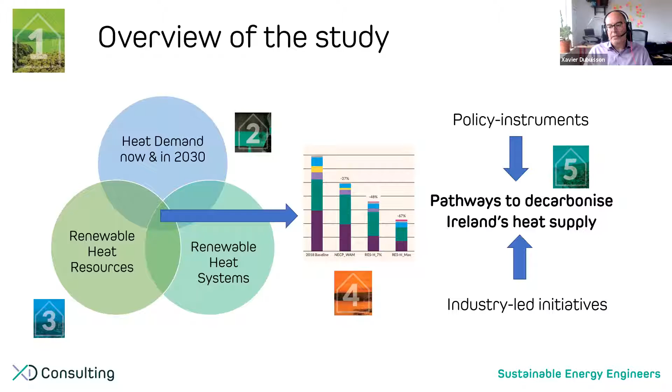Very importantly, there was detailed reflection within the group and the different members of the steering committee and their representative associations to feed into the chapter around policy instruments - what is the ask from the sector to government, at national and local level, to support the decarbonization of heat supply in Ireland, and also commitments by industry to take action. So a number of initiatives have been stated, and a declaration of intention very clearly setting out how the industry is going to support that transition.

So let's look at heat in a bit more detail. So far, heat has been the neglected sector in terms of renewable energy and decarbonization. In fact, the national understanding of heat is limited, so delving into available data to develop a clearer profile of heat was an important first step. And heat is actually a very significant part of the challenge in terms of decarbonization.

Heat represents about 21% of national greenhouse gas emissions, significantly more than electricity. Agriculture is about a third of all emissions, but heat is above 20%. It's very significant, also about 40% of national energy use. Every year we spend about 3 billion euros sourcing our heat supply. Most of that is imported in the form of fossil fuels, with 90% fossil fuel contribution to our overall heat supply, and we're depending for 65% on imports of energy to meet our heating requirements—fundamental for keeping our homes comfortable, our hospitals heated, and our factories going.

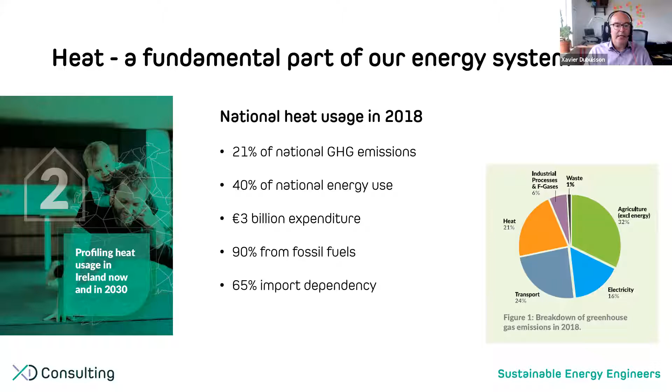So then we looked at heat demand into the future, using the National Energy and Climate Plan scenario with additional measures, which represents the policy landscape and expected outcomes for 2030. From that analysis of projections, we derived the likely future heat demand. If we look at 2018, on the left bar in the chart, you can see we're currently about 45 terawatt hours per year in heat demand, with the building sector representing around 60% of the heat demand, and industry playing a significant role.

But that role is going to grow into the future, where we see industry thermal energy demand growing significantly, while through energy efficiency and energy retrofits, we're going to see a drop in overall heat demand in the residential and tertiary sectors.

Another way to slice heat demand is to look at the temperature profile, which is really interesting in informing the kind of solutions suitable for decarbonizing heat supply. So in that context we looked at the distribution of different temperature profiles in terms of heat supply.

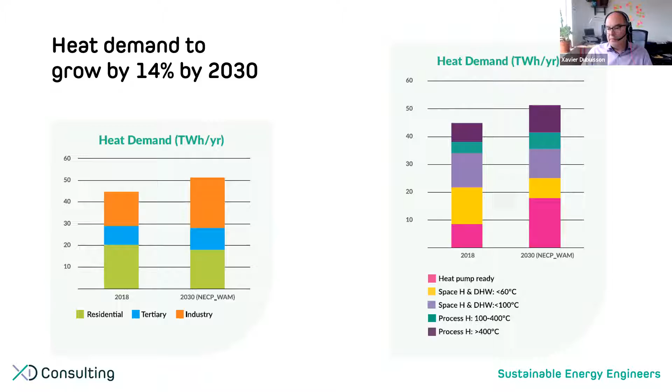So then we looked at all the renewable energy resources available to decarbonize heat across the whole spectrum. There was an extensive literature review and discussions and data gathering with the different associations involved in the study, to look at how much solid biomass we have, the extent or suitability of heat pumping in the building sector, biomethane or biogas, the role of district heating, solar energy, geothermal energy, and also very importantly, the availability of waste heat.

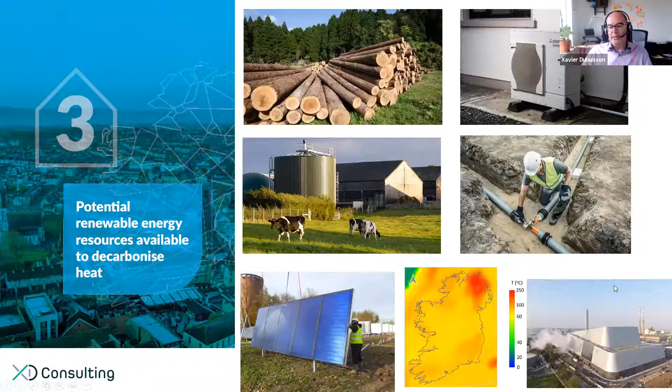Out of that resource or potential assessment, the key message that came clearly out of the analysis is that there are a lot more resources available than our future heat demand will require. You can see on the graph on the left the extent of renewable heat resources available in terms of the potential identified, and on the right side you've got the similar bar chart I showed you earlier with the projected heat demand.

Again, the key message is that we have plenty of resources within Ireland to meet our future heat demand and decarbonize it with renewable energy sources. Within that, we see a very important role for bioenergy, with about 34% of the potential resource available.

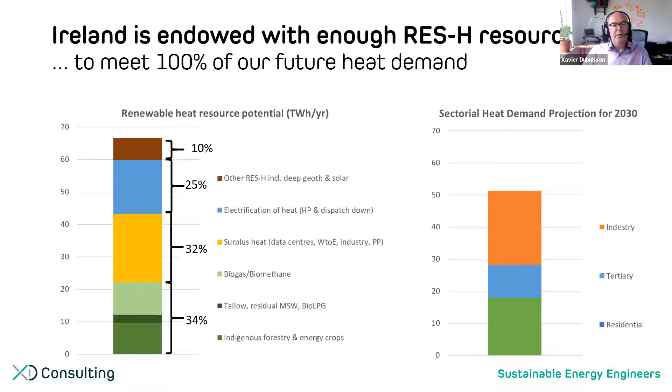Surplus heat, which hasn't been really featured very much so far in the debate around our options, represents a very significant potential. We have about a third of the overall potential identified. Then obviously the electrification of heat will play an important role through the deployment of heat pumps, but also capturing excess electricity in a highly intermittent system with very deep penetration of wind and solar energy into the future. We've also identified significant resources from deep geothermal energy and solar thermal energy.

So let's zoom in on two sectors of interest to the audience and the Irish Bioenergy Association membership. For solid biomass, we've identified readily available resources for 2030 - essentially forestry that's in the ground and growing. We estimate that by 2030 there will be 3.3 million cubic meters of timber available from forestry and wood processing, representing about 6.3 terawatt hours per year. There's also post-consumer recovery wood available at 0.4 terawatt hours per year.

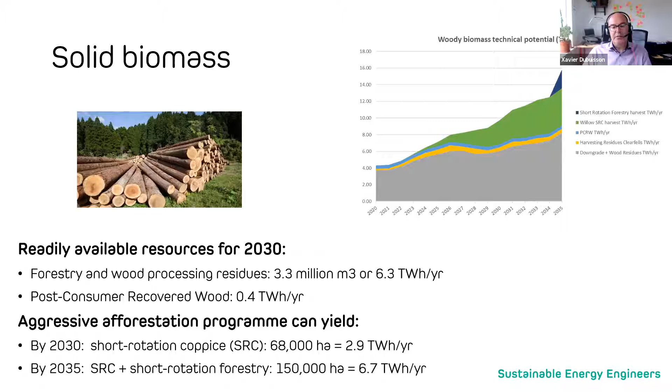We also anticipate an aggressive afforestation program that should yield significant bioenergy resource in the form of short rotation coppice, with a projection of about 68,000 hectares planted, yielding 2.9 terawatt hours per year of wood fuel. Concomitantly, a short rotation forestry plantation program will follow, and by 2035, within 15 years, we'll have newly planted intensive forestry in the region of 150,000 hectares, representing a resource of 6.7 terawatt hours.

In terms of renewable gas, the biogas resource available for 2030 was extracted from a number of resources, and overall we have a band of potentials identified in those studies: between slurry and manures with a potential resource of 0.7 to 1.4 terawatt hours per year, segregated food waste representing 0.6 terawatt hours per year in biogas or biomethane, and then the more significant resource coming from grass silage, with projections between 3.4 to 8 terawatt hours per year.

So in discussion with the relevant associations, we adopted two potential contributions in terms of our projections: one by IrBEA and Cre, equivalent to 1.6 terawatt hours per year by 2030, and one by the RGFI with a more ambitious program of anaerobic digestion deployment, achieving 5.6 terawatt hours per year by 2030.

There are other potential resources available for the production of renewable gas, including the treatment of residual municipal solid waste with 1.1 terawatt hour potential identified, tallow with 0.8 terawatt hours per year, and bioLPG with a resource of 0.5 terawatt hours per year in indigenous resources, plus the potential to import another 1.1 terawatt hours in bioLPG.

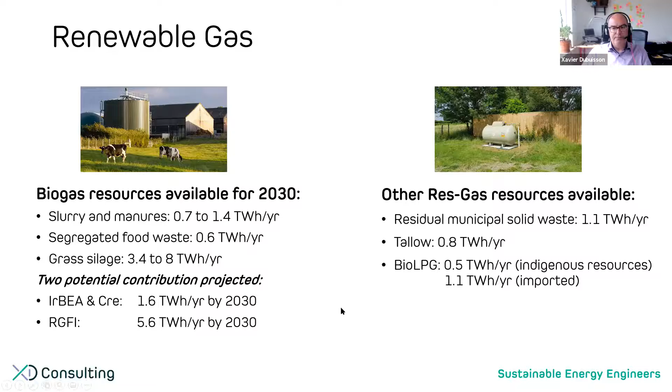When we looked at different scenarios and potential deployment of renewable heat resources and associated technologies, we modeled different options and adopted a central scenario which shows that achieving a 40% renewable energy supply for heat is very achievable, putting Ireland on track to achieve 7% CO2 abatement per year, as in the Programme for Government targets.

Within that central scenario, district heating meets 10% of heat demand in homes, covering about 190,000 homes, and buildings in the services sector, using surplus heat from power plants, waste energy plants, industry and data centers, and to a lesser extent bioenergy outside of the main urban centers. The focus would be to target areas with a very high degree of heat density, primarily in our city centers.

Solid biomass will play a very significant role in that scenario, meeting 18% of national heat demand using forestry products and byproducts - again referring to the projection of 3.3 million cubic meters per year - and energy crops with a plantation of 68,000 hectares of short rotation coppice being productive by 2030.

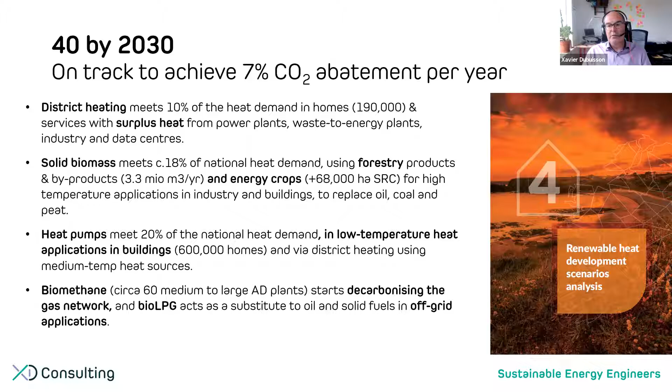What you can see from the 2018 baseline to our central scenario of 7% decarbonization per year is that 40% of the overall final energy supply will come from renewable energy sources for heating requirements. Within that, biomass, biogas, district heating and ambient heat from heat pumps will play a very significant role, with electricity driving those heat pumps and direct electricity use. A further share of renewable energy will be available to meet our heat demand.

And we can see a significant diminishing role for the incumbents in terms of fossil fuels. The result in terms of decarbonization is that this scenario can deliver almost 50% CO2 reduction in the heat sector by 2030.

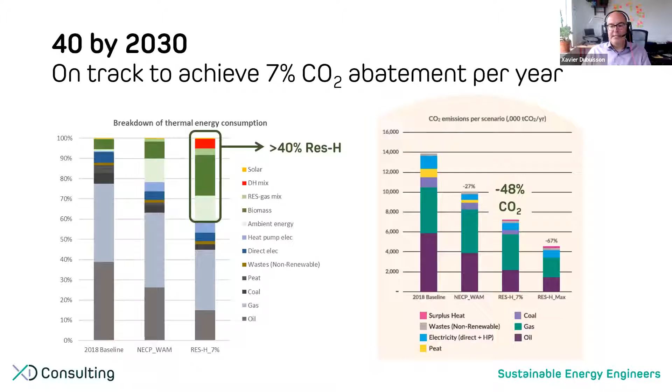So in terms of cost benefit analysis, obviously there'll be significant costs in terms of capital investment for the deployment of the renewable heat systems, which we estimate at 9.6 billion euros between now and 2030. Overall, the cost of the heat system, if we consider the annualized cost of that capital investment, as well as the operation and maintenance cost, as well as the energy supply cost...

We're going to see an increase of 250 million euro per year in our overall heating bill compared to 2019. So that's a 7% increase.

The cost in terms of abatement is estimated at 86 euro per ton abated of CO2, and that compares to a carbon tax projected to be at 100 euro per ton of CO2 in the program for governments. And it's interesting to see that there's been a very significant increase in the level of carbon pricing, which is now at around 50 euro per ton.

So I think there are clear signals in that regard, and decarbonizing heat with renewable energy options will pay significant dividends into the future in terms of CO2 abatement.

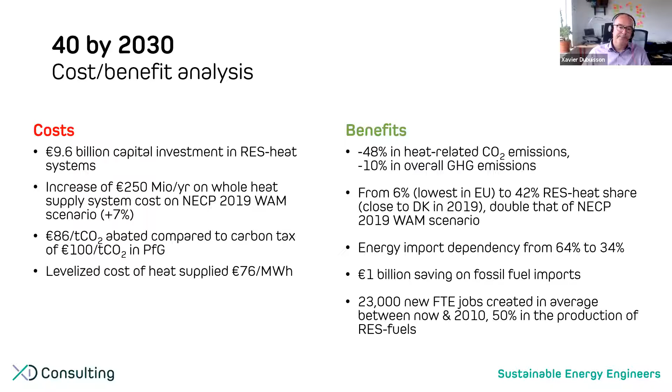So in terms of how do we get there, as I mentioned earlier, there was an extensive consultation and discussions within the steering committee and the representative associations as to what policy framework we need to achieve that 40 by 30 scenario or target.

Overall, there are 40 actions recommended for government and industry within the report. I won't give you the full list today, but that's available in significant detail in the annexes of the report. I'll mention the top 5 we identify as cross-sectorial, so across the different renewable energy resources available and the different subsectors involved in the process.

What we see is that there's a clear demand for updating the building regulations and the BR assessment method to reflect properly the benefits of renewable heat in terms of decarbonization.

We also look for a simplification of the regulatory and administrative requirements for funding schemes, essentially cutting down the red tape and making the grant system work more efficiently and become more accessible.

Also, very importantly, the implementation of Article 23 in the Renewable Energy Directive, with introduction of a renewable heat obligation scheme, which will require an annual increase in the renewable energy heat share in our heat supply by 2% every year.